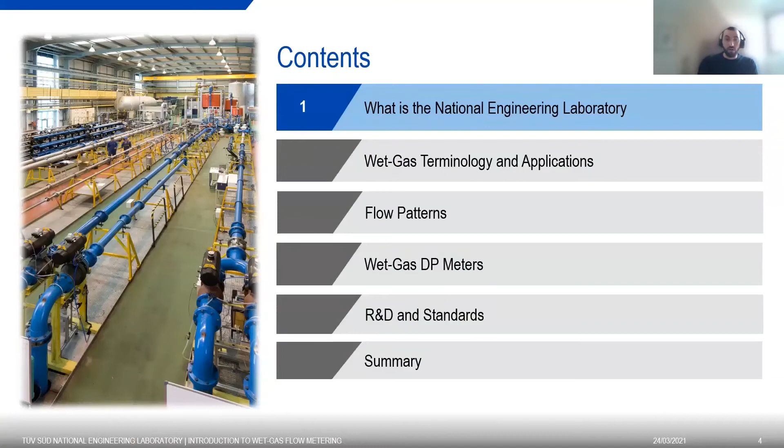So let's start. What is the National Engineering Laboratory? Well, it's a laboratory that was established in East Kilbride in Scotland in 1947, and it was a UK government research laboratory. In 1995 it was privatized, and now it's part of TUV SUD. We conduct a lot of research on behalf of the UK government still, and we hold the national standard for flow measurement and density. So as I was saying, we are part of the UK National Measurement System, and we are the designated institute for flow and density metrology. So we are responsible to provide the UK's physical flow and density measurement standards.

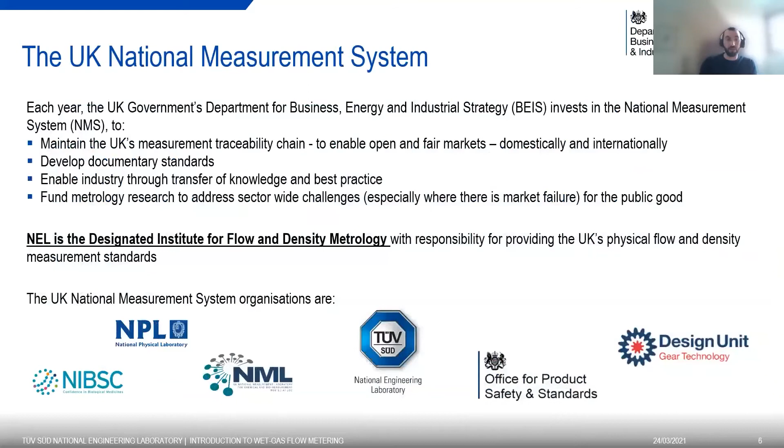And just to remark, we carry out a lot of research on behalf of the UK government on topics like metrology and flow metering. So, which are the sectors that we support? Historically, NEL worked a lot with the oil and gas industry, the water industry, and also emission monitoring. And now, society as a whole is approaching new challenges, which are digitalization, clean fuels, decarbonization of our society, and also life science. And these are all areas that we are working on. We have teams on each of these areas that are conducting extremely nice research in these fast-moving, exciting and challenging areas.

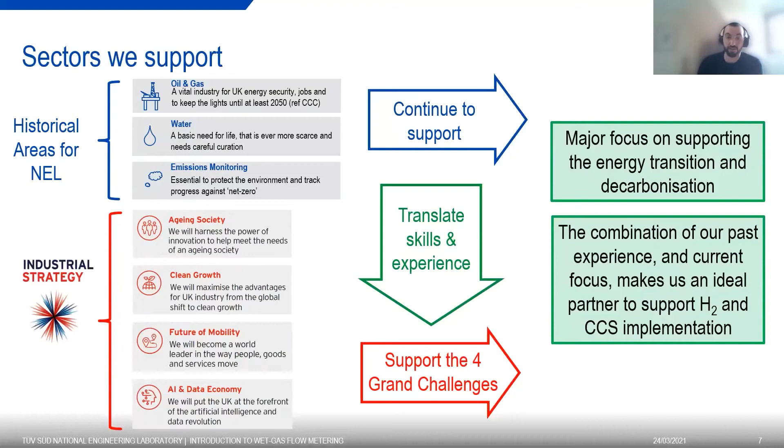So just a quick overview of our facilities and our building. We have the James Young building, which has the gas facility. This is a dry gas facility. Mainly, we run it with nitrogen, but we also run it with argon, helium, and in the past, we ran it with CO2. So we are planning to do that also for the future, for the topic of CCS. We have also our single-phase oil facility and our new hydrogen facility for domestic gas meter testing.

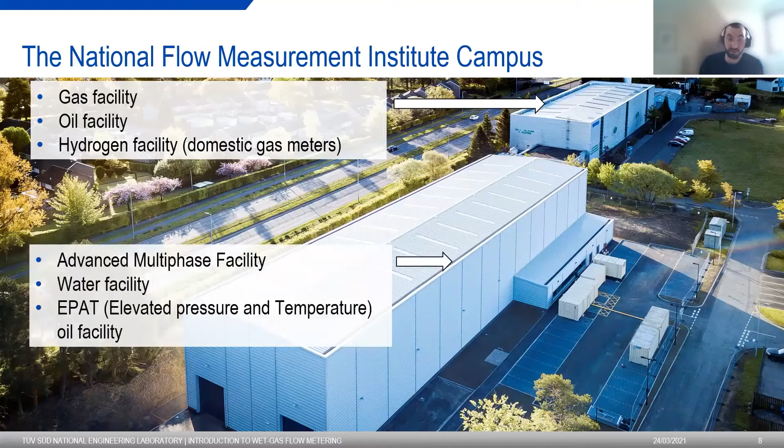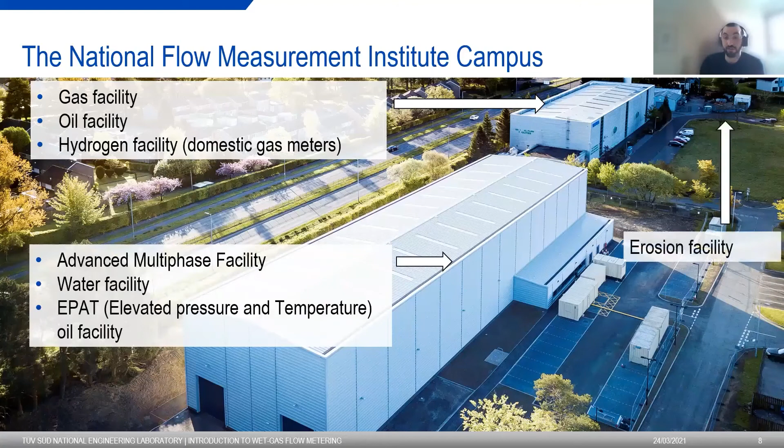Then in our new building, the Reynolds building, we have the new Advanced Multiphase Facility, which goes up to 140 bar gauge static pressure. And this is a fully multiphase facility where we can test flow metering, wet gas flow, as well as multiphase flow. We have our water facility and our EPAT, elevated pressure and temperature oil facility. Then the erosion facility and the primary density lab for fluids.

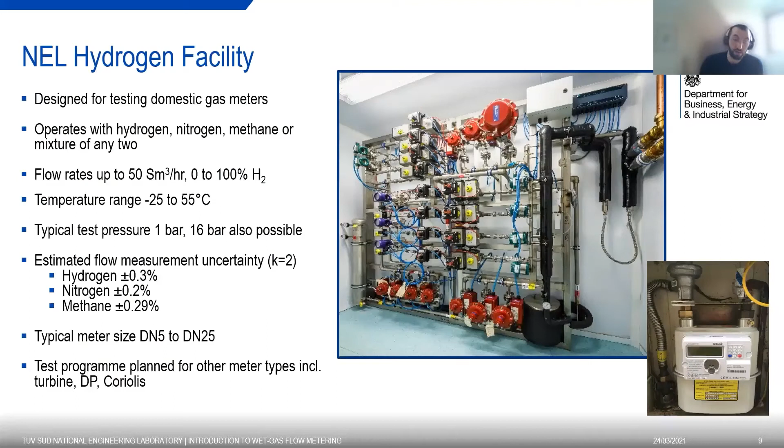Just a few words on our new facility on hydrogen. You can see the facility in a picture on the right-hand side. It's a very compact facility and was primarily designed to test the domestic gas meter, but we can test whichever meter you're interested in. It operates with hydrogen, nitrogen, and methane, a mixture of any two. So we can also test the performance of the meter with mixtures of gases. This facility has been fully commissioned, and it operates with sonic nozzle reference meters and laminar flow elements, but we're planning to build a primary standard for hydrogen for this facility. So that was a quick overview of NEL.

Now we will crack on with the topic of the talk. So, some wet gas applications and terminology. Let's, for a second, assume that you have a nice glass pipeline, so a pipeline made of glass, so we can see through the pipe. And in your pipe, you have mainly gas, which is colored in green, and you have also a small amount of liquid, which is here in red. In this case, the gas flows on top of the liquid nicely, so it's called stratified flow. And this is the flow that we want to measure.

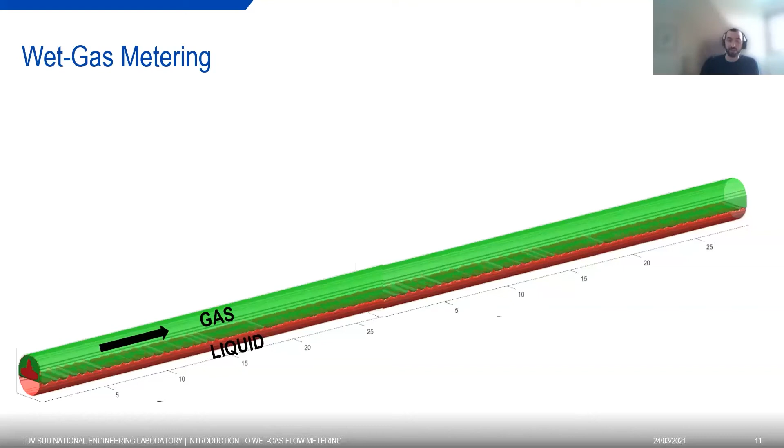Strictly speaking, this is a two-phase flow because we have the gas phase and the liquid phase. These are two phases. So our aim is to put here a meter and to get some flow measurement out of it, which are primarily the gas flow rate, because, as I was saying, the flow is primarily gas with a small amount of liquid, so that's probably our main interest.

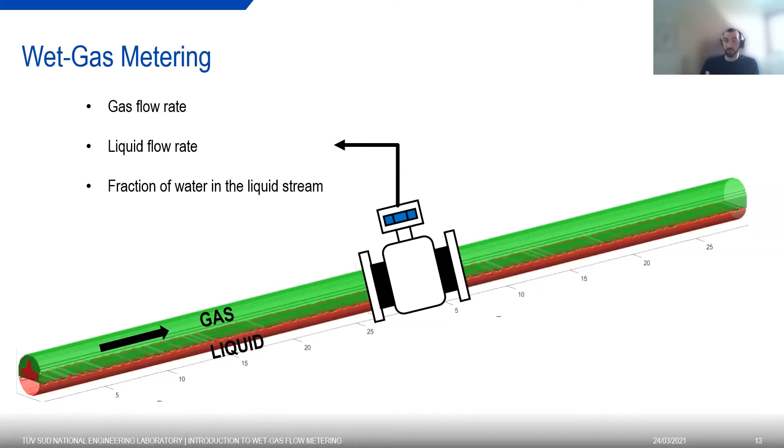But most of the time, we are also interested in the liquid flow rate and the fraction of water in the liquid stream, because in the liquid stream, we can have different components according to our application. So let's see some of the applications of wet gas meters.

One of the first applications, and probably where everything started in terms of research and development, was steam generation. So the first correlations are for steam. What happens when you have a pipeline with steam? Well, if you have a drop in pressure and temperature, you can start to condense some of the steam, so you will form some liquid water. And then the question is how your meter performs when you don't have 100% steam, but you have some amount of water. And that's when you need to use wet gas meters.

And so that's for the power generation industry, but nowadays there are also a lot of applications in the geothermal sector. So again, you can have some steam and some brine, and you have this two-phase flow that you want to measure for your process needs.

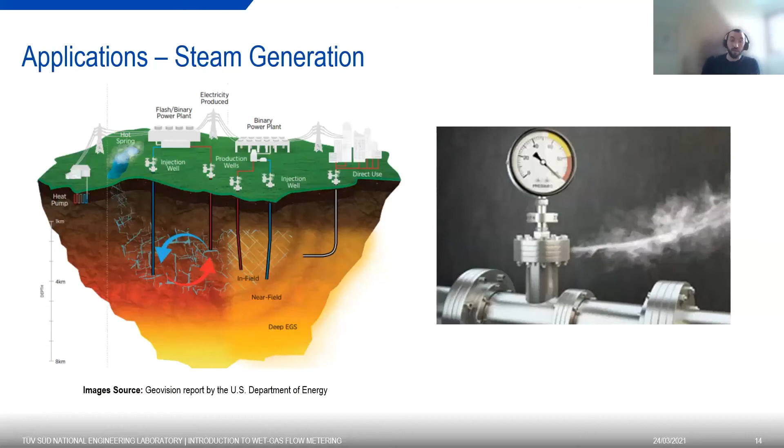Then probably one of the biggest applications, where a lot of attention and research was carried out, is natural gas production and blue hydrogen production. Why am I saying blue hydrogen production? Well, we are moving towards hydrogen, CCS and a decarbonized society, but natural gas production will probably still play a role in the near future, because we can produce what is called blue hydrogen by methane reforming.

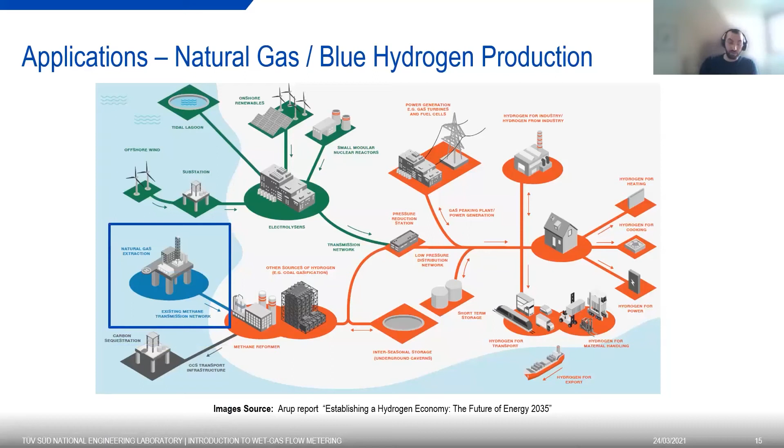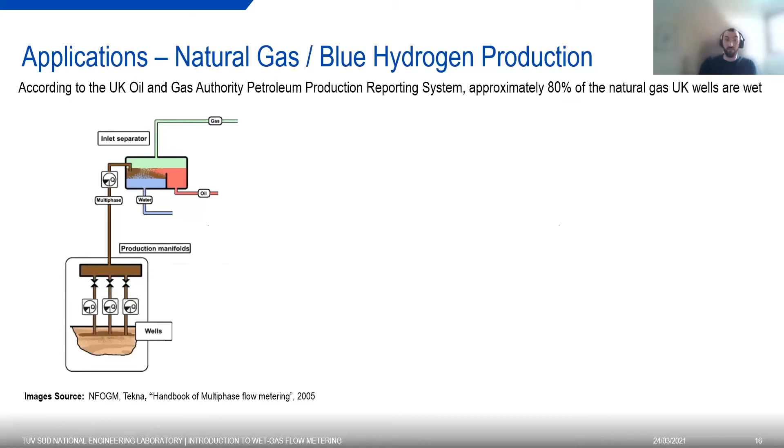Here you can see the picture, and I just put in the blue box what is an offshore natural gas production platform, for example. In these cases, most of the wells are generally wet. So what you get out of your reservoir is not just dry gas. You have a small amount of liquid as well. And the benefits of using a wet gas meter here are many. One of them is possibly to replace the test separator, which is a bulky and expensive piece of equipment.

But you will have several advantages, which can be reservoir and well management, production optimization, flow assurance, and also digital transformation. This is also a key point, because a wet gas meter in your infrastructure will give you a lot of real-time data that you can also use for diagnostics or, for example, for predictive maintenance. So that's a wealth of data you can get out of a meter.

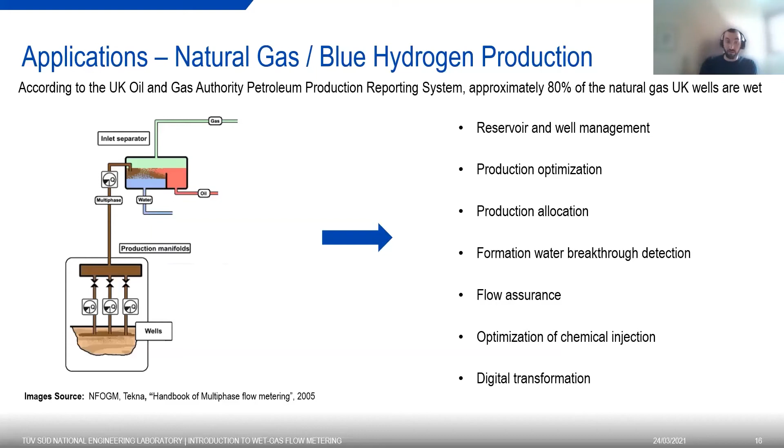Just a few words about which kind of fluids you will encounter during natural gas production. So again, you will have a gas, which is, of course, in this case, a natural gas, but you can also have some minor gaseous components. And you will have your liquid phase, which is most of the time a mixture of condensed hydrocarbon and water. And the water in your liquid phase can be either condensed water, but also formation water from the reservoir. So this is just to give you an idea of which kind of fluids you will encounter during natural gas production. Of course, as I was mentioning before, during steam generation, you have steam and it's all water, liquid or gas.

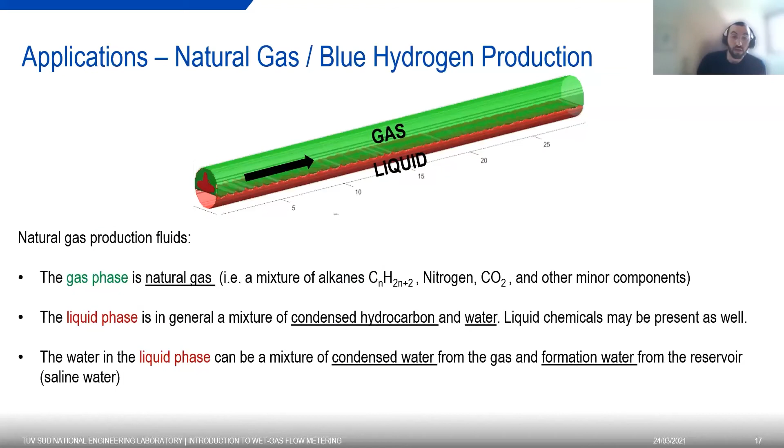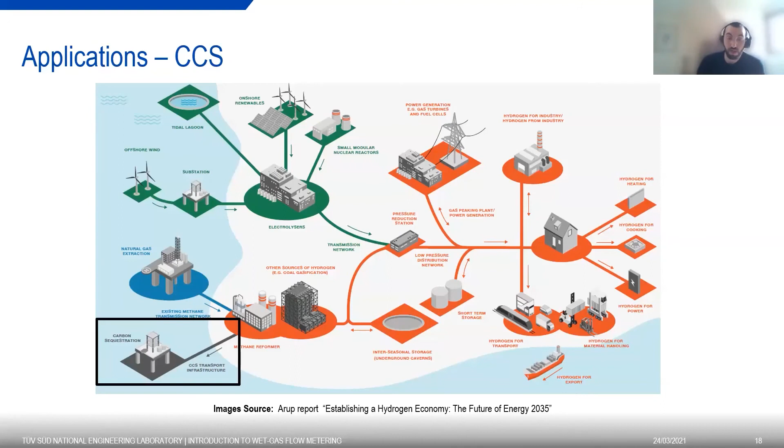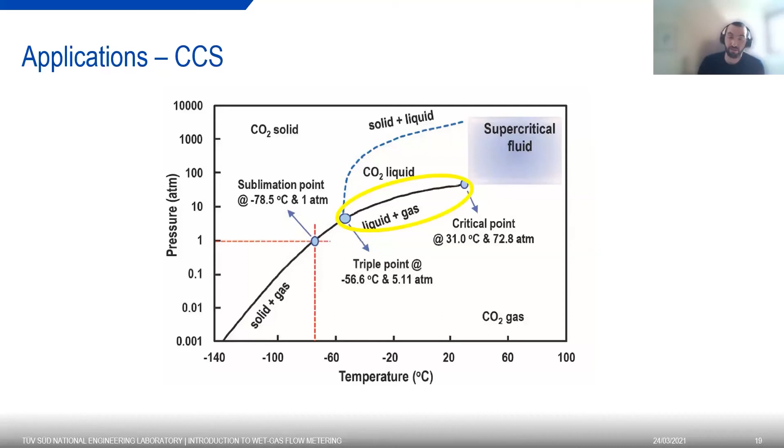Of course, we will try to stay well away from any phase change boundaries, but it's probably good to keep that in mind, and in case, to have in the field some meter that can cope with wet gas flow. So those are some applications, and now I will go through some terminology. I will go through it quite quickly, but you can also see these slides yourself in your own time, and there is a lot of info in the public domain.

But how is wet gas flow defined? I was just generally saying a stream of gas with a small amount of liquid. Yes, but how do you quantify that? Well, generally nowadays we say that wet gas flow is a flow of gas and liquids where this parameter called the Lockhart-Martinelli number, indicated with the symbol X, is less than or equal to 0.3. So when this parameter is between 0 and 0.3, we say that your flow is wet gas flow. Alternatively, you can use the GVF, which is the gas volume fraction. So when the gas volume fraction is greater than or equal to 95%, roughly, we speak about wet gas flow.

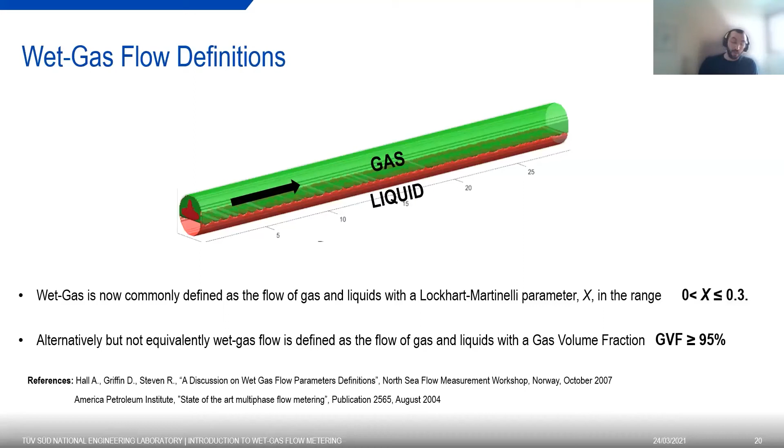So briefly, what is the Lockhart-Martinelli parameter? Really roughly speaking, to give you an idea, the Lockhart-Martinelli parameter defines the wetness of the gas. So let's say X is 0, that means you are in dry gas condition, you don't have any liquid. As soon as you start to increase X, the liquid loading will start to increase. And if you go up to 0.3, which is the upper maximum level, that will be your maximum level of liquid that you can have to be defined wet gas flow.

But you can go above that, and if that's your condition, it's generally referred to more as multiphase flow. But there is a tendency now to go a bit beyond the 0.3 at the minute.

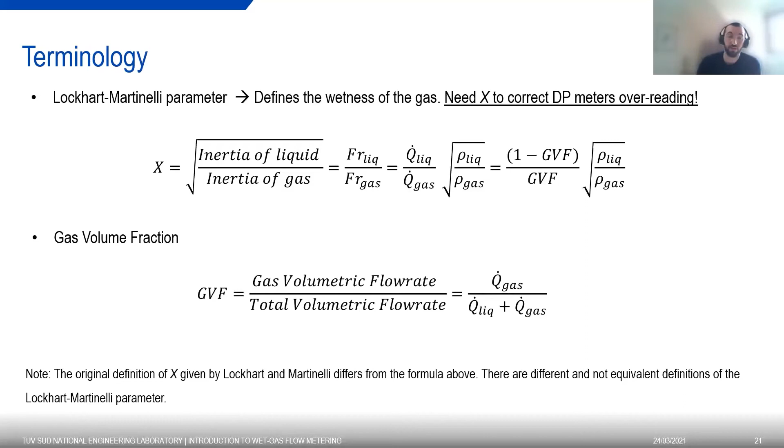The gas volume fraction is a ratio of the gas volumetric flow rate and the total liquid and gas volumetric flow rate. So it's another way to define the wet gas flow. Other couple of terms, adimensional numbers, which are quite useful.

We'll see this later when we speak about correlation and overreading. The Froude gas number - this is an adimensional number and defines the inertia of the gas against the gravitational force. So roughly speaking, when you have a high Froude gas number, the gas kinetic energy dominates. If you have a low one, the gravitational force dominates.

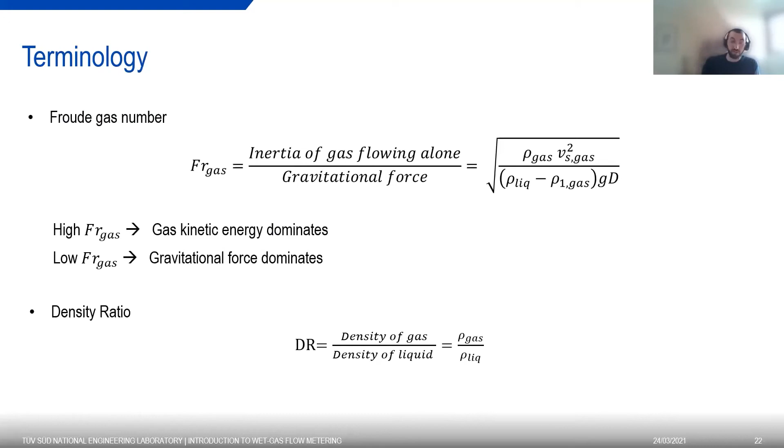Then another term is the density ratio, which is just the ratio of the gas density over the liquid density. The water to liquid ratio, water to liquid mass ratio, represents the fraction of water in your liquid streams. One is in terms of volumetric flow rate, the other in terms of mass flow rate.

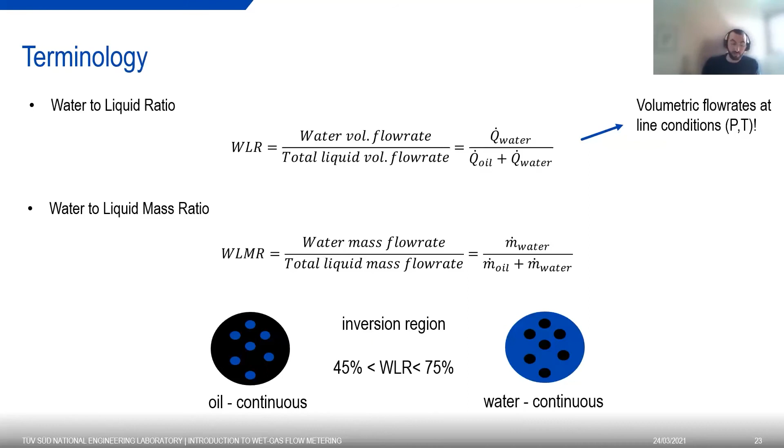So you can go from mainly oil in your liquid stream, you are close to 0 water liquid ratio. Then if you go to 100 water liquid ratio, it means that all the liquid is water. So that was a bit of an overview of the terminology and application.

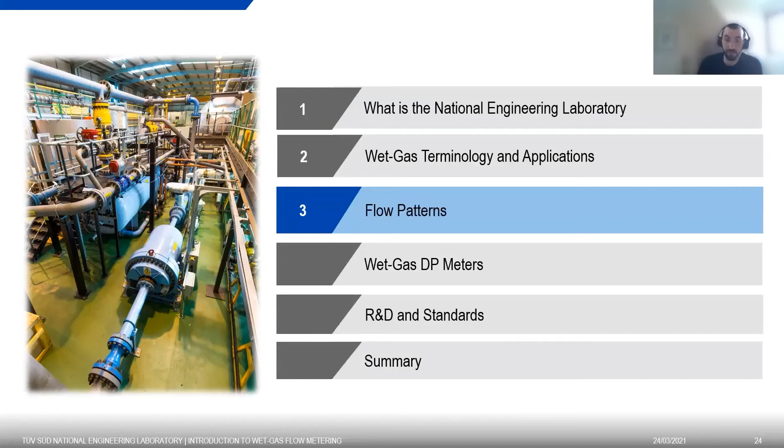We will move now to what are called flow patterns. And so I will show now to you a video to give you an idea of what flow patterns are.

So flow patterns, strictly speaking, is the distribution of the gas and the liquid, the two phases, inside the pipe. They can be distributed in different ways. For example, stratified flow, as I was saying before, the gas is on top of the liquid.

So you can immediately see here that even though the process conditions are the same and the flow rates are the same, the inclination, the orientation of the pipe will play a big role in determining the distribution of phases in your pipeline.

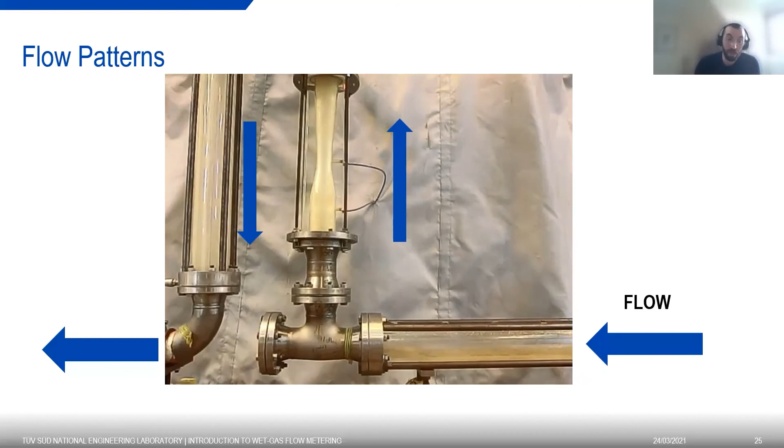And another video, again flow from right to left, you can see a mixture of gas and liquid in a Venturi tube. And here what I want to show is how the geometry of your meter also influences the flow patterns.

Because you can see here in the divergent section of the Venturi, a lot is going on. It's a quite chaotic flow there, and it's quite difficult to model, honestly.

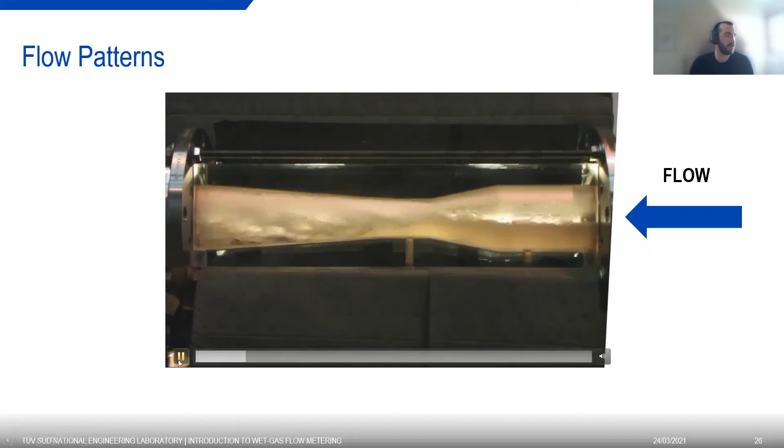We can see here also what is called slug flow. You see, the pipe gets almost all full of liquid at a certain point, and that's slug flow. So at a certain point, here we go - you have a pocket of liquid approaching.

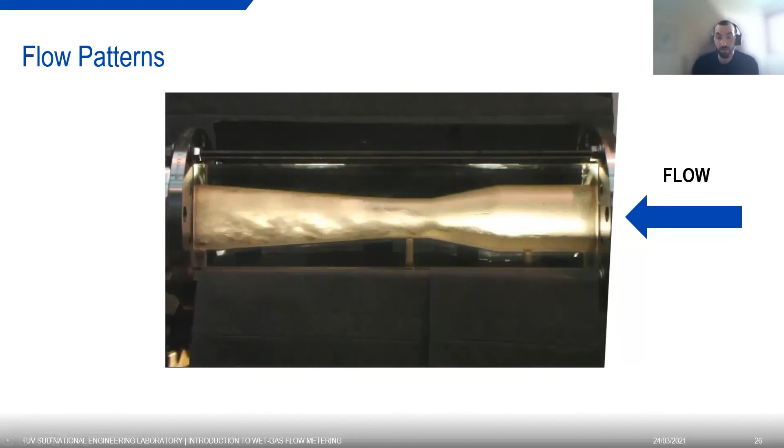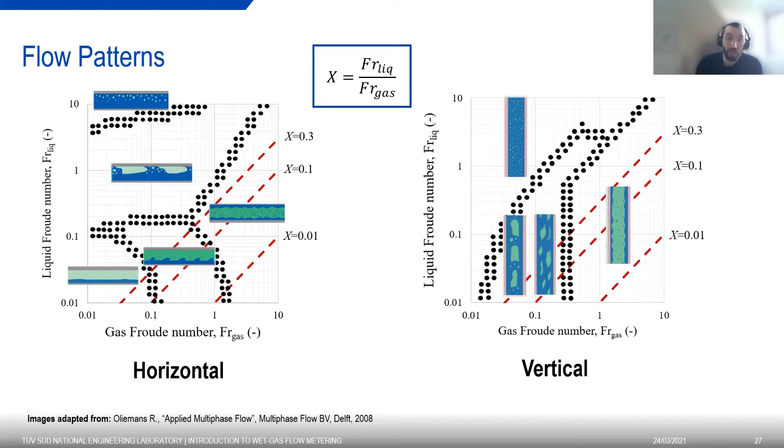So you can see we can have different distributions, okay? And what I want to go through with you briefly, because that's quite an important mechanism to understand how the meters work in wet gas flow.

So now we are going to increase the gas flow rate, the gas Froude number. That means our gas kinetic energy is stronger now, right? What will happen is we will move in this direction. We are keeping the Lockhart-Martinelli parameter at a constant value. And you see, since the gas dynamic force is higher, we will start to entrain some liquid in the gas phase in form of droplets. And the gas is strong enough to disturb the liquid interface, so you have waves and entrainment.

Then again, we keep the Lockhart-Martinelli constant and we increase the gas Froude number, and this will increase more the kinetic energy of the gas. At this point, the gas is strong enough, let's say, to lift part of the liquid layer on top of the pipe or close to the top. You have to imagine that most of the liquid layer will still be on the bottom, but you start to form a liquid layer on the top as well. This is annular mist flow, and you have a lot of entrainment of liquid in your gas stream. And this is an important mechanism, okay?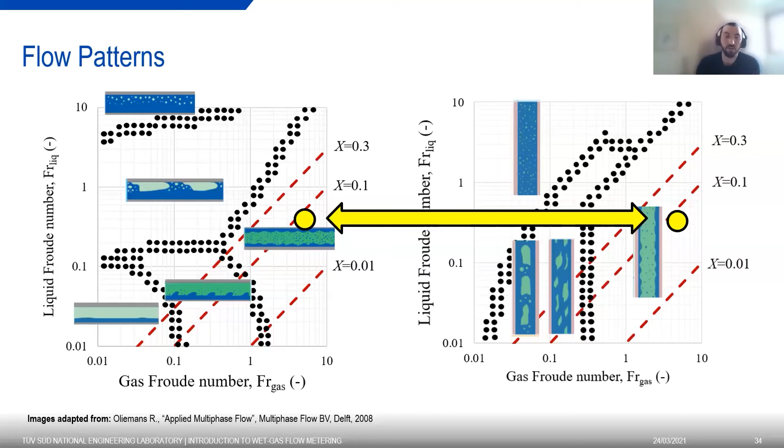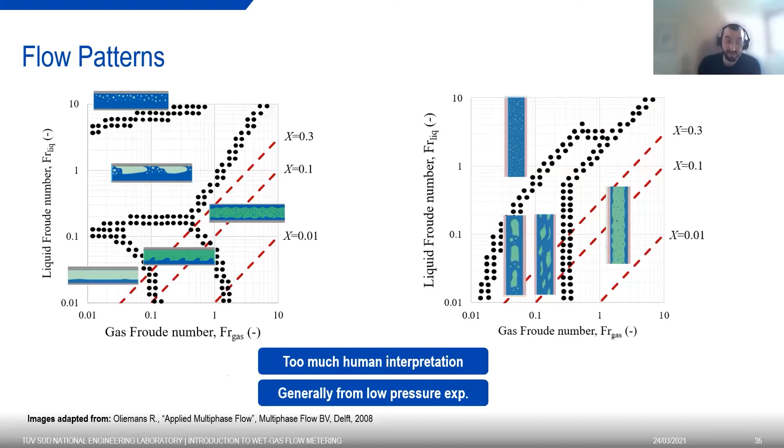Flow regime maps - there are a lot of flow regime maps out there. A lot of research was spent there. Sometimes it really depends on the fluid properties, the pipe diameter, orientation. There's a bunch of things to care about. I just want to underline two of them. Most of the time, they're based on human interpretation - so someone that interprets the flow regimes inside the pipe. And sometimes they are based on low pressure experiments. So we need to be careful here. It's difficult to generalize these flow regime maps.

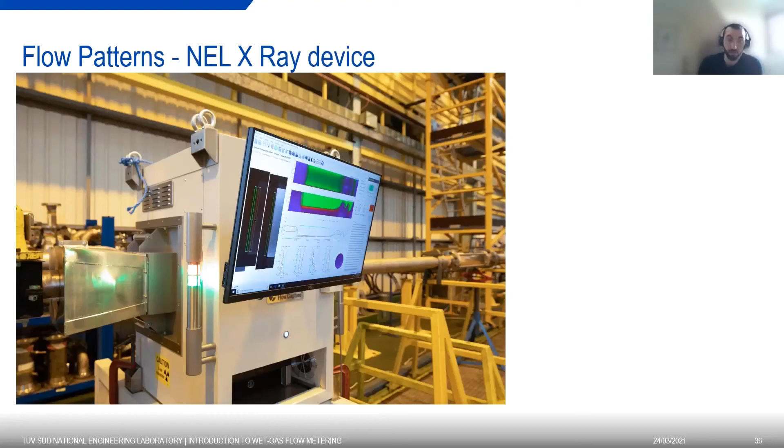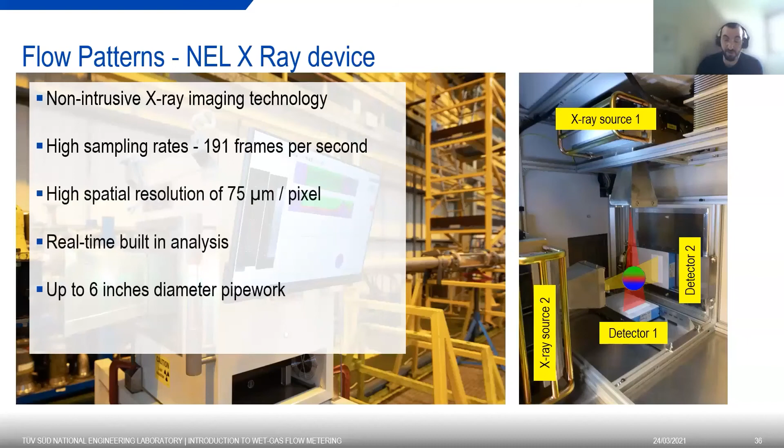What we are trying to do at NEL to fill some of the gaps, or at least to try to fill some of the gaps, we have invested in an X-ray device. So that's the X-ray. We have a big pipe that we can look through. We have X-ray sources, and you see we can scan basically inside and look at a cross-section inside the pipe. This is basically something that we can use at high pressure, because you cannot use a glass pipe or perspex pipe at 140 bar. So that will allow us to go at high pressure, and that's what we have done in the past, and we are doing - so we are developing flow regime maps at high pressure as well, low and high pressure.

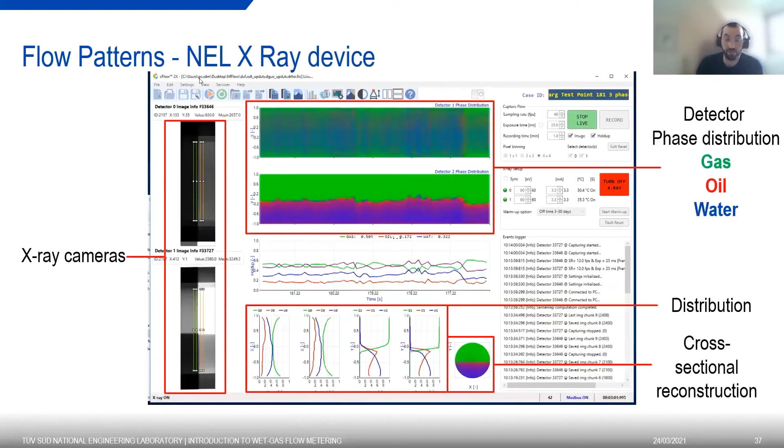Here you can see how the X-ray operates. That's the screen. And what we are doing, we are trying to develop this kind of flow regime maps according to the X-ray results, and using also machine learning algorithms, which are trying to reduce the impact of human judgment on these flow regimes. Also, we are using the response from pressure sensors installed. This all feeds into the machine learning algorithm.

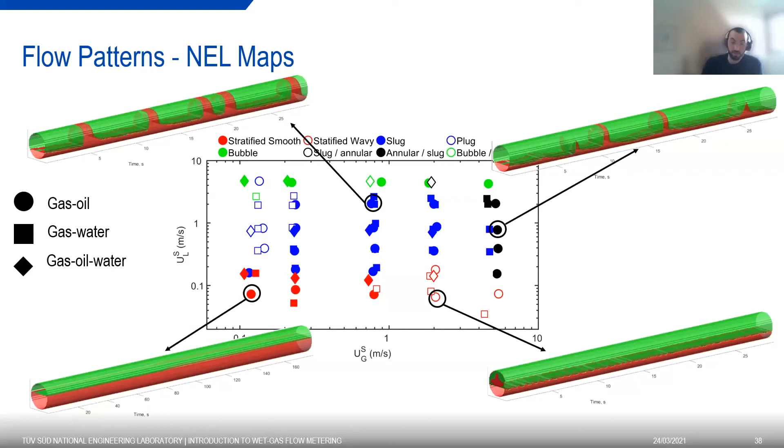So that was just a quick overview of flow patterns and some of the key mechanisms - much more to say, but we will stop there. And we will move to wet gas metering with differential pressure meters. That's a lot of meters where you can use wet gas. I'm going to focus primarily on differential pressure meters.

I would say there are probably three main categories of wet gas meters. The first one would be the single phase flow meter with correction factor. That's single phase gas flow, and you just have one measurement. You don't measure the liquid amount or the water cut.

Then you have the two-phase wet gas flow meters. Here you're trying to measure both the gas and the liquid flow rates, but you don't measure the water cut, so the fraction of water in your liquid.

The third category, definitions are sometimes a bit gray, but I would call it multi-phase wet gas flow. In this case, you meter the water, the hydrocarbon condensate, so you know the water cut, and also the gas flow rate. These are generally differential pressure meters with additional measurement devices.

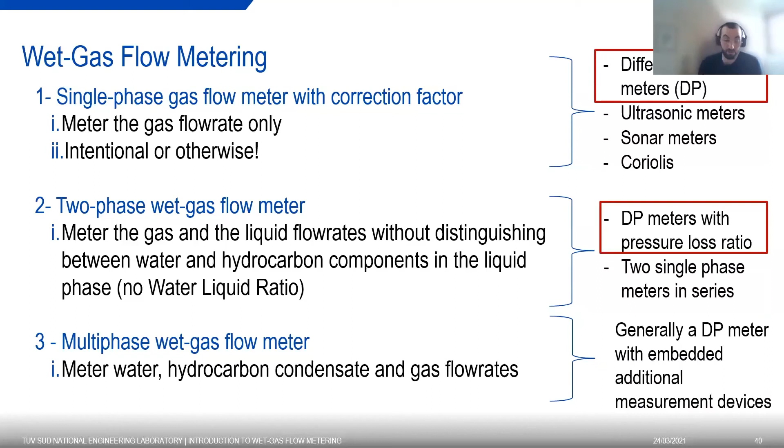DP meters, we probably know all about them. They've been covered by ISO 5167. This ISO is currently under revision, so probably next year you will find an updated version. Generally, the main DP meters are Venturi tube, Orifice, cone, and wedge meter.

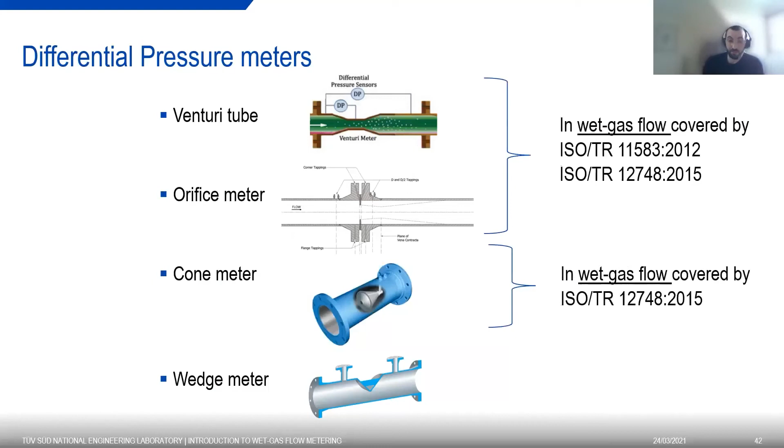In single phase, they're covered by ISO 5167. In wet gas flow, we have two technical reports, ISO technical reports, which cover Venturi, Orifice, and cone. So you can go and have a look at them. That's a lot of information there.

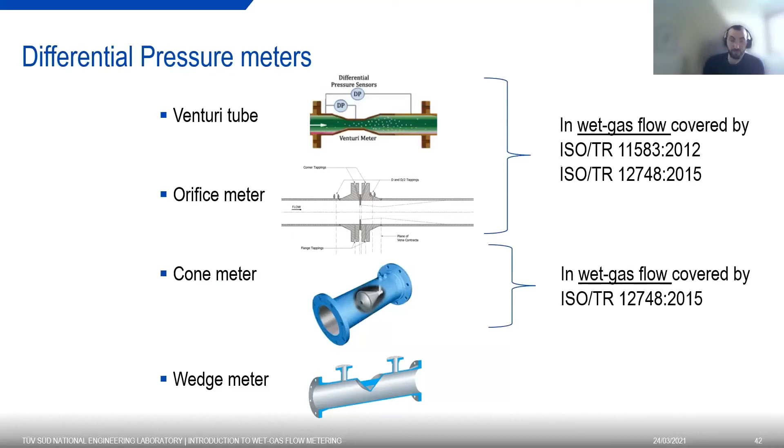Very briefly, how differential pressure meters work. You have a flow to a restriction, and here you can think about the Bernoulli theorem. The flow needs to accelerate, and if it accelerates, the pressure at the throat, at the restriction, needs to be lower. So we can measure the difference in pressure and relate it with the flow rate of gas. I'm talking about single phase flow.

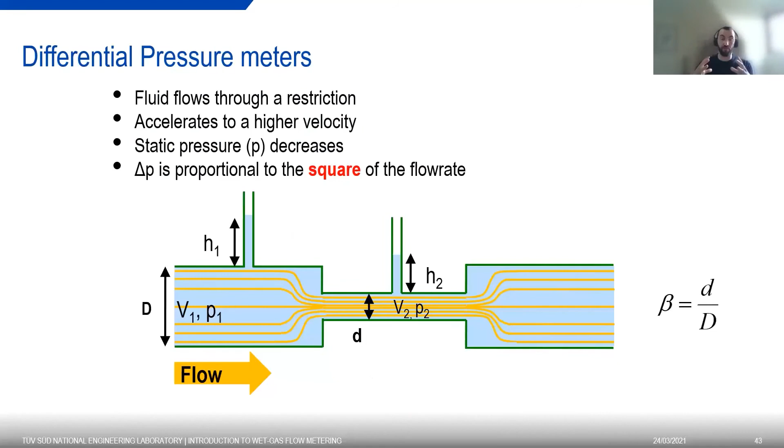You will generally find a parameter called beta, which is the ratio between the diameter of the restriction and the diameter of your pipe. This is the equation that you use in single phase dry gas flow, a well-known equation found in the standard.

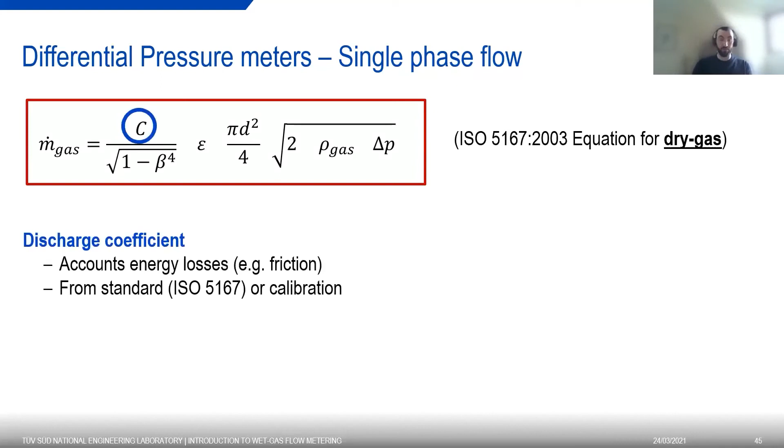C is the discharge coefficient, which accounts for energy losses, for example friction and other kinds of energy losses. The expansibility factor accounts for the fact that gas is compressible, so we need to account for that when we have a difference in pressure. Then the gas density is an important parameter we need to get accurately. And the differential pressure is something we measure.

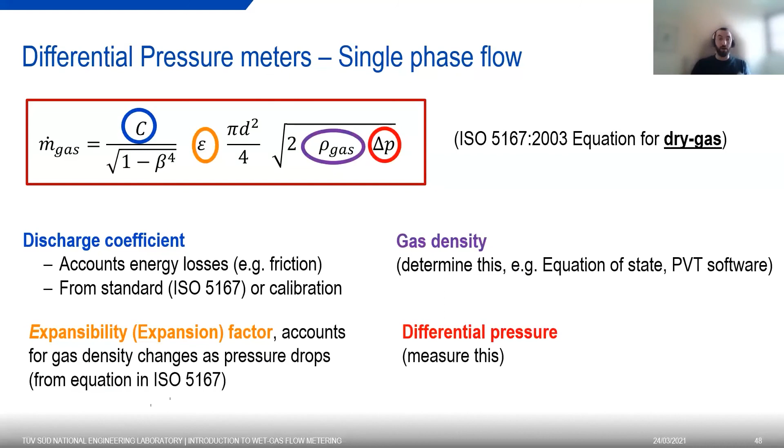Why is it called overreading? Differential pressure meters have generally a similar response to wet gas flow, and the liquid causes a higher measured differential pressure. So when you have liquid in your gas stream, the differential pressure is higher than if you don't have the liquid. It's called overreading because you will basically think that you have more gas than what is in reality, and this overreading is induced by the liquid flowing in your pipe.

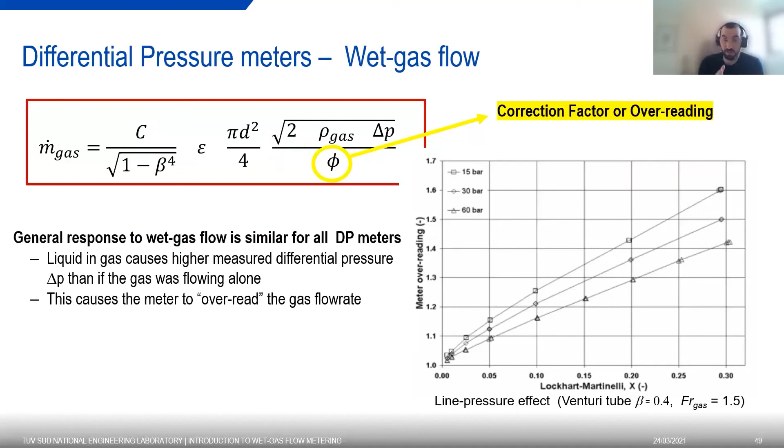In order to correct your meter, we need to get this overreading correction factor in some way. First, we need a function that describes the overreading, a relation. This relation can come from a fitted correlation, an experimental semi-empirical correlation, or from modeling, physics-based models. But you need some kind of relation. The overreading will be a function of some variables, and for simplicity, I'm showing the Lockhart-Martinelli parameter and the density ratio, which is mainly a function of the gas line pressure.

Second point, we need to know the input variables. So we need to know the function, but we also need the variables that go into the function. For example, here, let's say our function comes from experimental results, like in this plot. We need to know first the Lockhart-Martinelli parameter X, and second, we need to know the density ratio to select the correct curve.

And then when we have done that, we will get our overreading factor, and we can fit that in our equation and correct the meter output. So this is a very simplified process, but it gives you an idea of what we are doing to get the overreading correction factor.

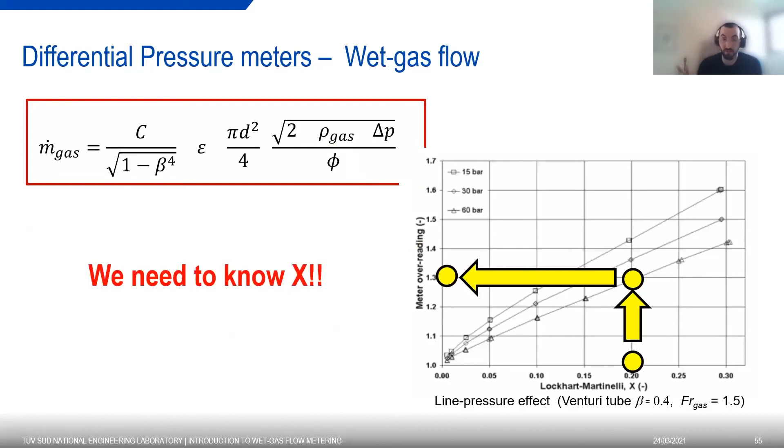An example, let's start with orifice meters, and in this case, I will just assume for a second that we know x. We have some second measurement that tells us the liquid flow rate, and we are able to fit this secondary measurement in our orifice meter. But the orifice meter itself just measures the primary differential pressure.

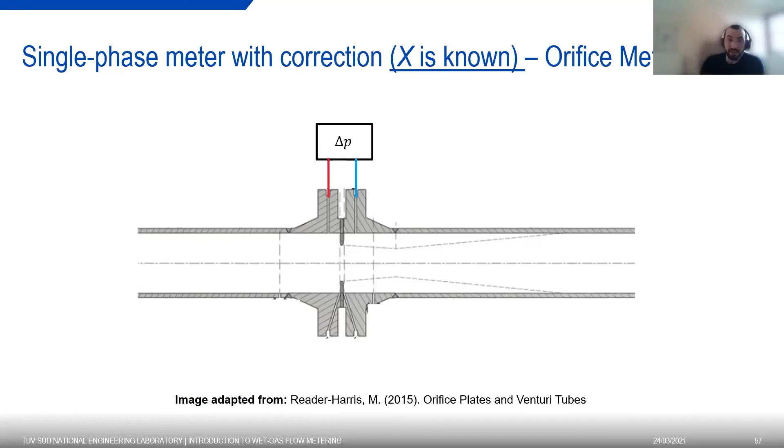Okay, so in this case, one of the first overreading correlations was developed by Murdock, let's say, that's probably one of the first, if not the first. And that was, as I mentioned before, a research work with steam, wet steam. And as you can see, this is a function of the Lockhart-Martinelli parameter only.

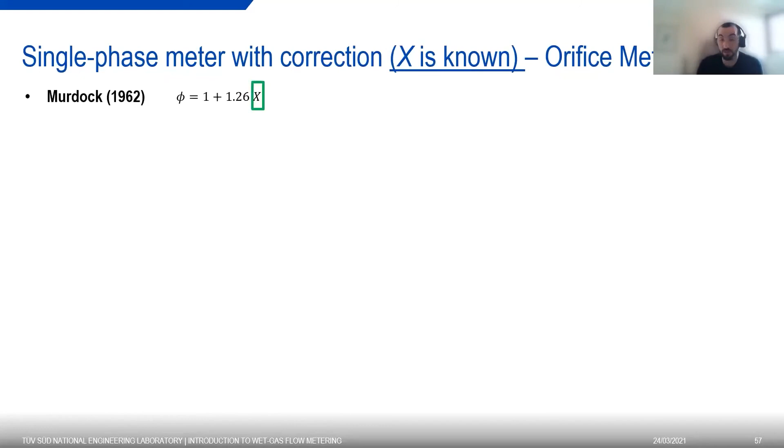Then for the development in 1977, you see we are going to introduce both the Lockhart-Martinelli parameter plus another term which goes down basically to density ratio. And we have this n exponent here, which is 0.25 for Chisholm in this case. We go further to today, and we have a further correlation.

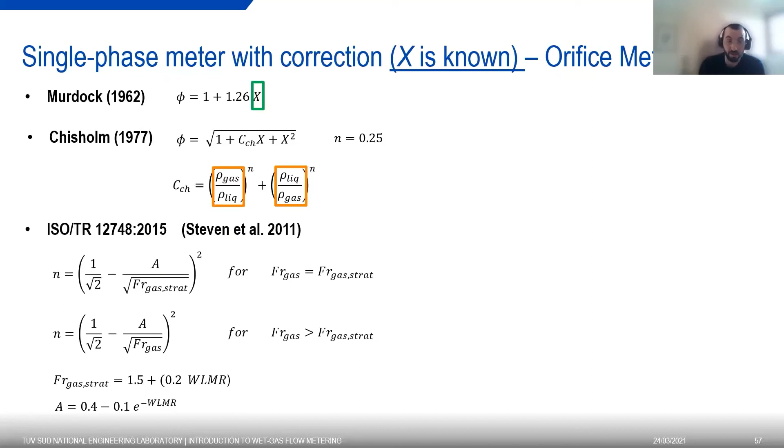And you see that the n parameter now is a function of the Froude gas number, okay, and also of the water liquid mass ratio. So we have introduced further variables to our function, to our correlation.

And of course, you can go into details of the correlation in much more detail later. You can ask me a question if you want. I'm happy to answer any question. But what I just want to give you is the feeling that correlations evolve.

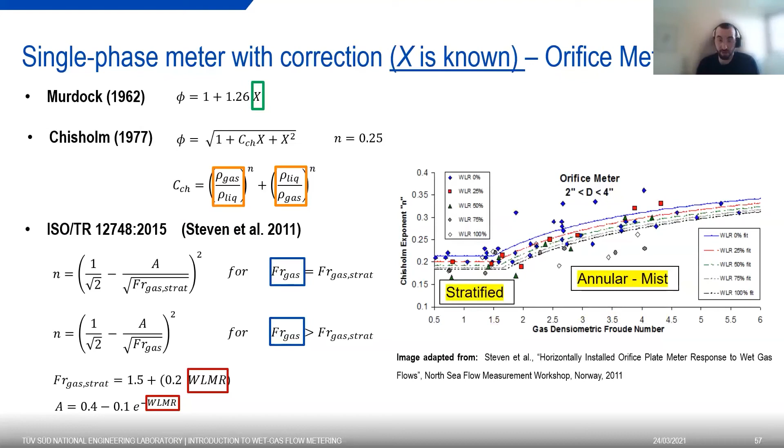We have more parameters. And also, in this case, it's quite nice, this graph, because it shows you the importance of flow regimes. Because this n exponent with the correlation by Steven is related to the flow patterns. In this case, stratified flow is a bit constant, and then you can see that it increases with the liquid entrainment process in annular mist flow, and also is a function of the liquid properties.

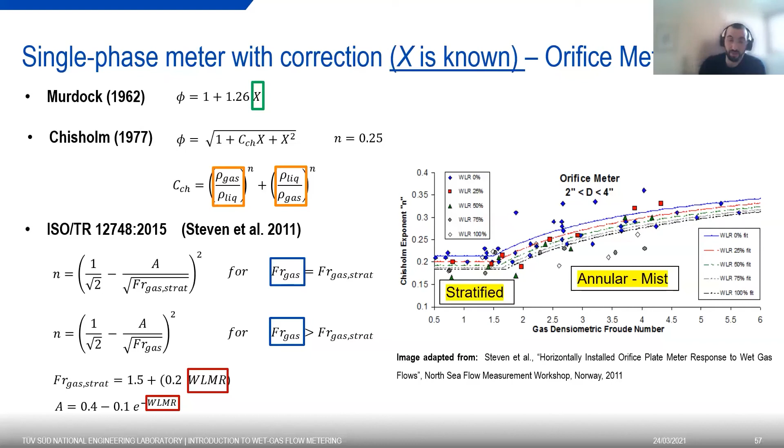If you use Steven equation here on a population of orifice meters, you see if you don't correct the meter output, you have your percentage gas error on the y-axis as a function of the Lockhart-Martinelli on the x-axis. If you don't correct that, the error is this diagonal line. You can go up to 40–45% error in gas flow measurement.

Okay, that's something. But if you use the overreading correction factor, you are in the region of ±2% of gas flow error. So that's pretty remarkable in my opinion. Again, this is a simplified case. This is not what you will find in the field. You need to know X.

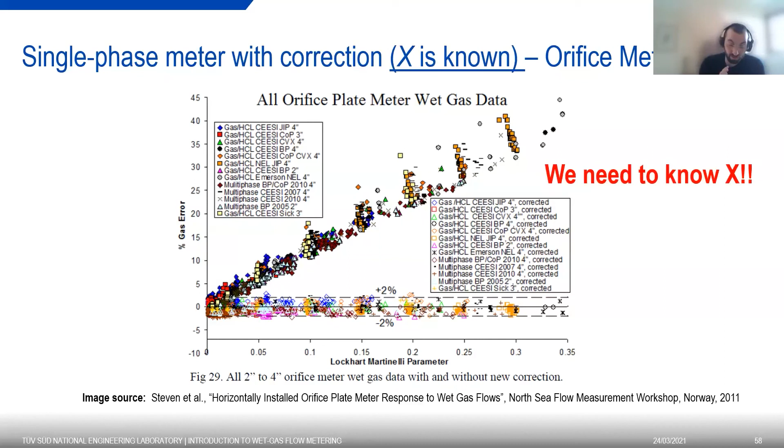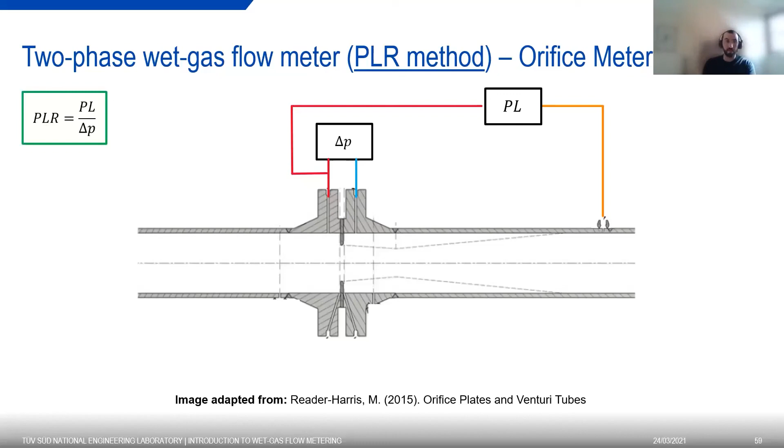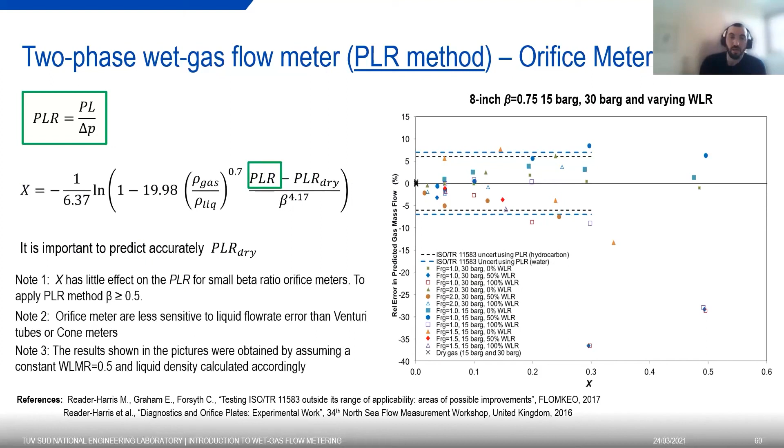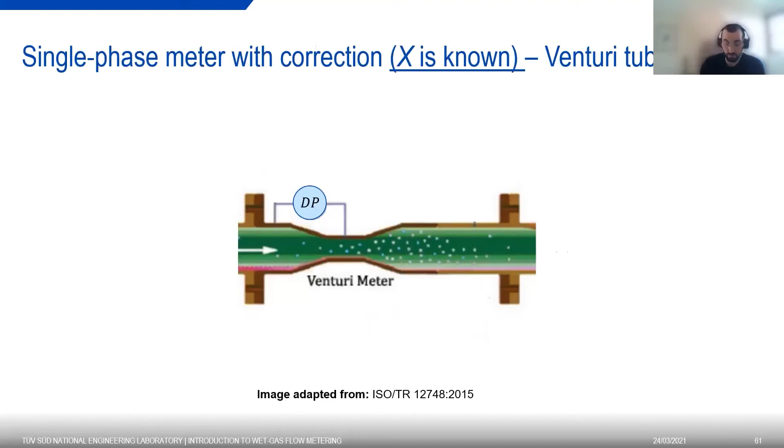Similarly to orifice meters, we can do the same with Venturi tubes. And again, we will start just assuming the simple case where X is known by some secondary measurement. I'm not going to speak about how you can measure that in this talk. And again, another correlation that's specific to Venturi tubes was developed by de Leeuw. And again, here I want to stress that there is a clear influence of the flow regimes in your meter response.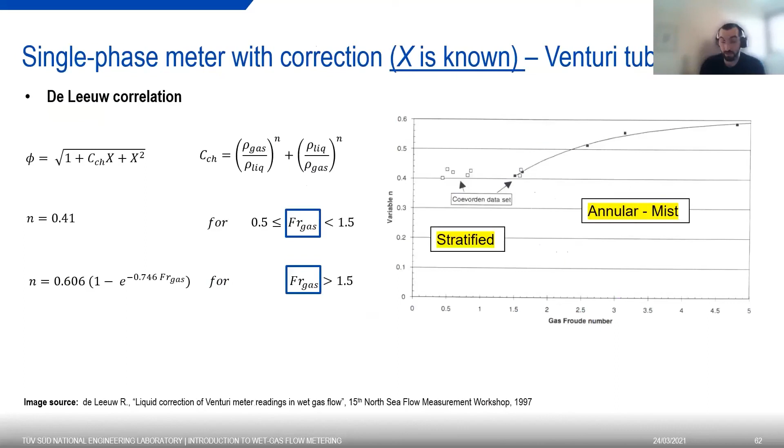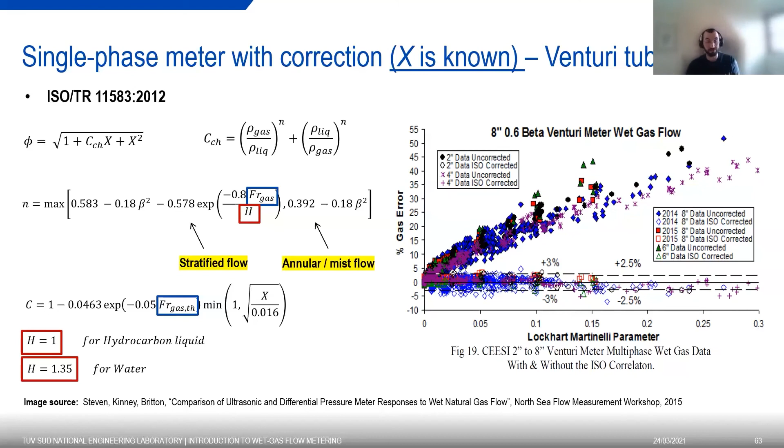Another correlation, which is included in ISO TR 11583, includes also the liquid properties. I wanted to show you the impact of correcting or not the output of your Venturi tube in wet gas flow. The diagonal points are the uncorrected ones, and you see you can go into the region of 40% error. But if you correct with the correlation I'm showing on these slides, you can get to around plus or minus 3%. Again, you need to know X in this case, the Lockhart-Martinelli. This correlation can work with different water-liquid ratios too.

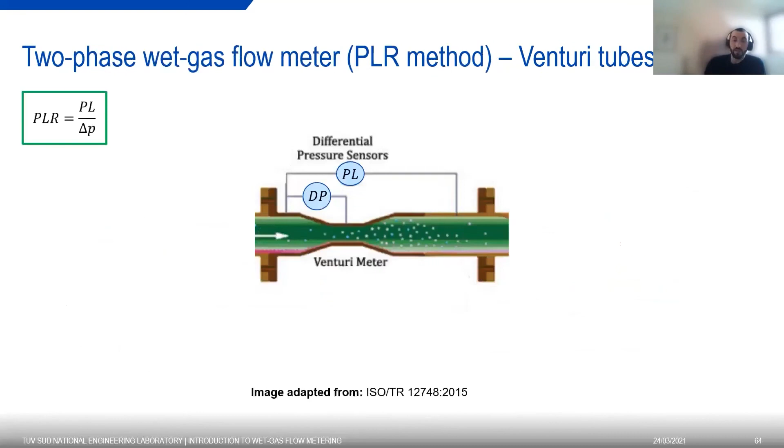We can also use the pressure loss ratio method, similarly to the Orifice Meter. There is an equation in ISO TR 11583, which is public domain, that you can use to get your Lockhart-Martinelli parameter. The error here in gas flow rate is, if I remember correctly, in the region of plus or minus 6%. But there is a but: you can only use this equation from the standard at very low Lockhart-Martinelli values. So there are limits we need to overcome if we want to use this method in the field.

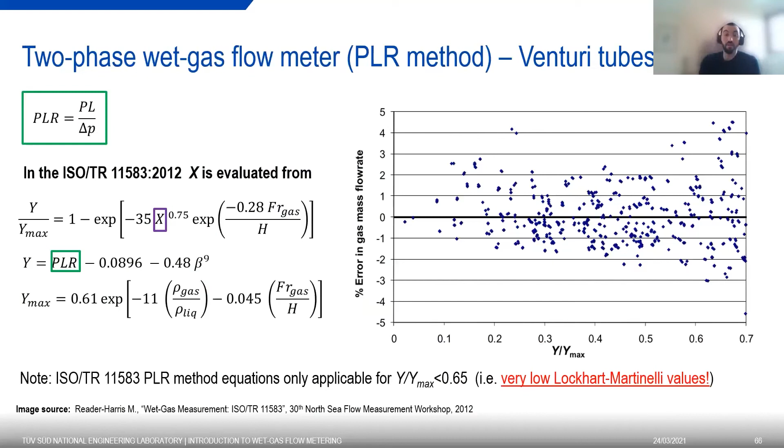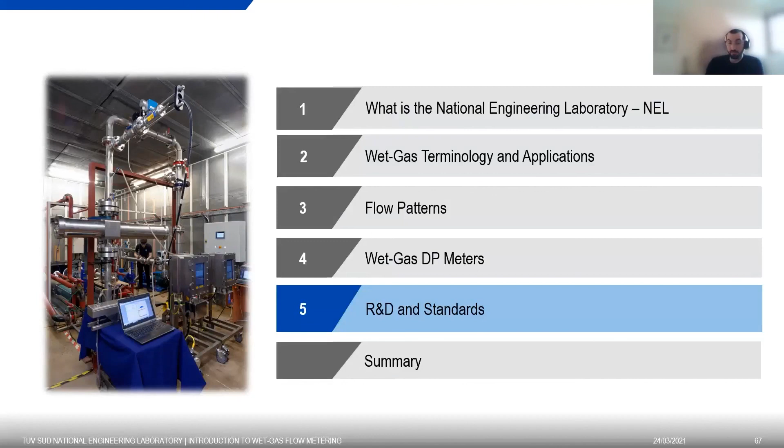Over an extended range - so that was an overview of the response of Orifice meters and Venturi meters in wet gas flow. I will move now to some R&D and give you some reference to some standards.

R&D that we are doing at NEL - in the past we have done a lot of research with Orifice Meters and Venturi tubes in wet gas flow. That research informed the development of ISO 11583, the technical report.

At the minute, what we are doing is research into vertical Venturi tubes, and also trying to extend the limits of applicability of the current overreading correlation and of the PLR method to higher Lockhart-Martinelli values. That's of paramount importance if we want to develop this technology.

As I was saying, we establish flow regime maps with our X-ray device, also at high pressure, and we have run a lot of experiments both in wet gas and in fully multiphase flow with the X-ray up to 130 bar, if I'm not wrong - so from 7 bar to 130. And here there is a list.

There is also interest in CO2 wet gas streams, as I was saying, for CCS applications. And I'm quite pleased to say that we are going to start soon a PhD project in collaboration with CENSIS to develop a wet gas meter based on Venturi tubes.

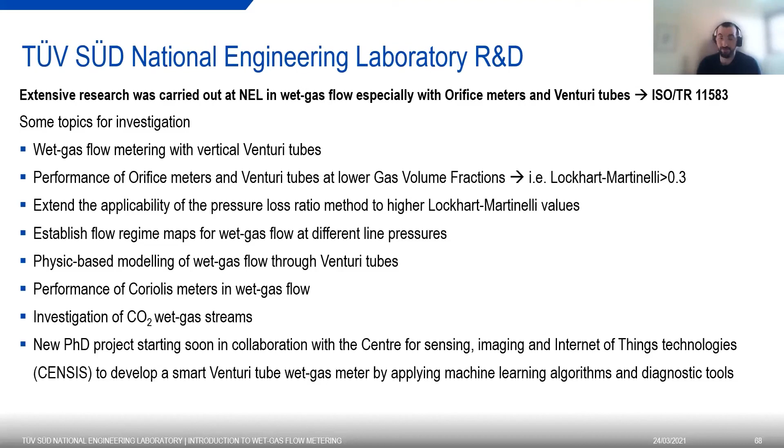This design has both straight tappings and inclined tappings. The idea is to use this Venturi tube both in horizontal orientation, using the straight tappings, and vertical orientation, using the inclined tappings. So far we have found, and also in previous experiments - we wrote a paper at the North Sea Flow Measurement Workshop about this - that the inclined tappings work well in vertical flow, because one of the biggest concerns is that you can flood your impulse line with liquids, and when it goes down the throat, it's not nice, I can tell you. So you definitely need to avoid having liquid in your impulse line.

That's also got other solutions - you can reduce the length of your impulse line, or have your DP kind of attached to your meters. So there are a bunch of different methods, but so far this one was working okay, working pretty fine. We didn't have any accumulation so far, honestly speaking.

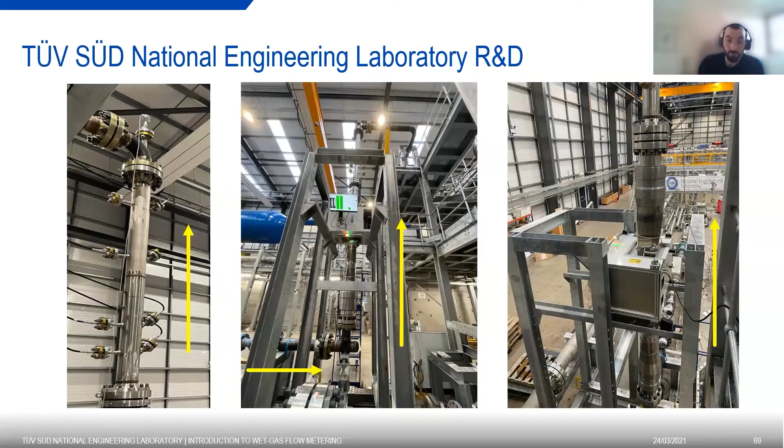We had this previous data set, and we were able to develop a new correlation for vertical Venturi. We are planning to get the correlation out in some papers this year. It's quite a nice correlation so far. So hopefully you will find that in some papers later on this year.

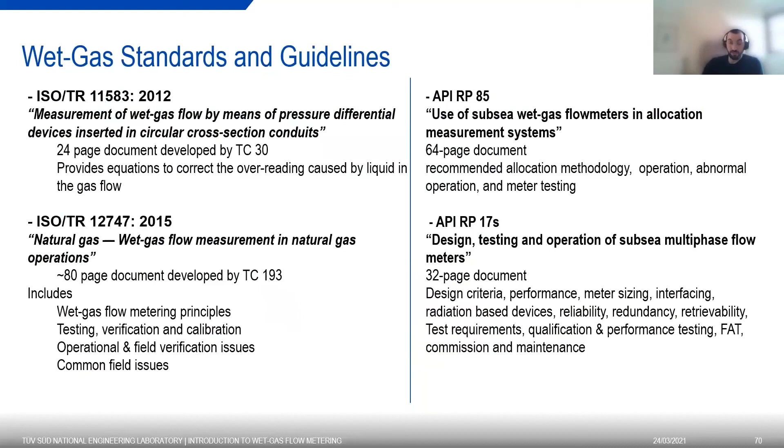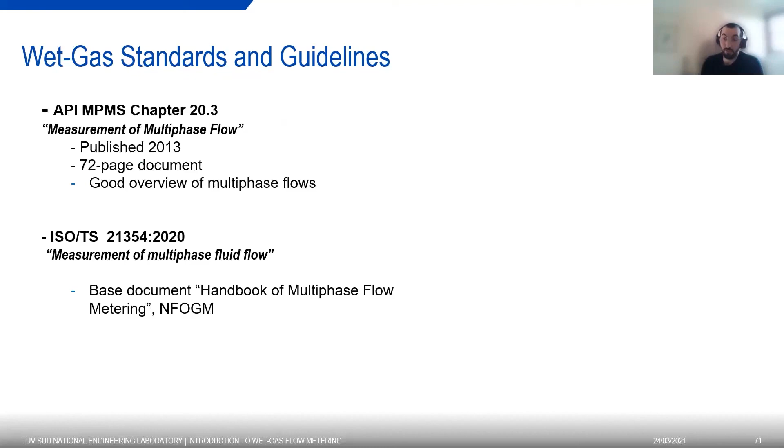Also, I just want to say that you can now find available ISO TS 21354, which was published, I think, at the end of last year, around December, if I'm not wrong. This is a TS on measurement of multiphase fluid flow. So again, there is a lot of info there.

So this brings the webinar to the end. Just some key points. We have covered some key definitions and applications, for example natural gas and blue hydrogen production, and this is just me trying to stress the fact that natural gas is going to play a role in blue hydrogen production. I hope I passed the message that flow regime is important, and so it's important to have an understanding of the flow regime in your pipe.

A brief overview of Venturi tubes and orifice meters in wet gas flow. We covered some of the key points. What I want to say is that this kind of technology can be robust, relatively cheap, and off the shelf. No black box, because as I was showing you before, most of the equations are publicly available. There are papers describing how the correlations and the physics-based models have been developed. So the user can understand first hand what's going on in the meter. And as I was saying, there are no proprietary equations, as they are in the ISO standard.